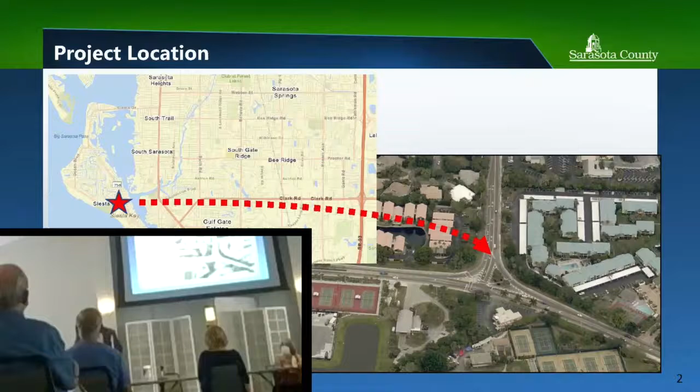We're here today because we have a really good opportunity in coordination with the Florida Department of Transportation. The county will be taking over State Road 758, or Midnight Pass Road, in addition to Stickney Point Road, the portion from 41 west. This is part of a road transfer provision. The county is giving the state River Road from 41 to 75, and the state is spending roughly $50 million to widen that road, along with the county's $25 million to build that project starting next year.

A term of that agreement was that the county would take over these roads on Siesta Key in perpetuity. But the state has committed to providing an intersection improvement project that's also part of a larger project, which is resurfacing Midnight Pass Road all the way from Stickney Point Road up to Shadow Lawn Way. The reconfiguration of the intersection at Midnight Pass Road and Beach Road has been in the works for several years.

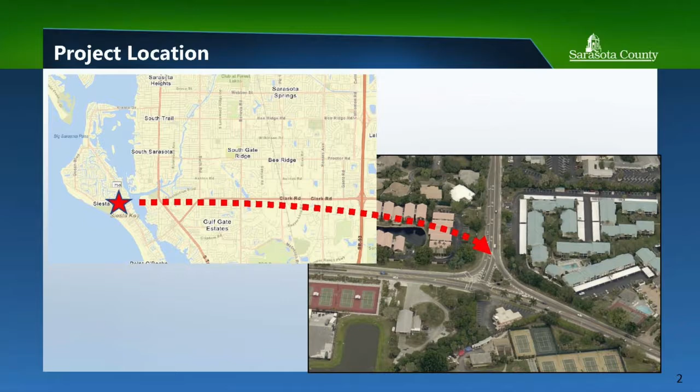It got started back in 2015. The state actually came and had a meeting, similar to this, a workshop, and provided some alternatives to the community.

So in 2015, they provided three alternatives. One, obviously, is a no-build alternative. The second alternative was to improve the existing signalized intersection, so remaining with red, green, yellow lights and pedestrian crosswalks, and I'll go into more detail on that. The third option was to reconstruct the intersection as a roundabout.

In 2015, the public was not in favor of a roundabout. So the DOT, while informally in favor of a roundabout, decided to move forward with alternative 2, the signalized intersection. Currently, from 2015 to now, they have gotten to approximately 60% design, and this all aligned with our road transfer project.

The question arose at some point: is there any consideration to revisit the design of this intersection as a roundabout? So we talked to the county commission a week or so ago and asked them if they were interested in us going back out to you all, the public, to see if there was interest in a roundabout or not. That's why I'm here tonight, to give you some information on those two alternatives.

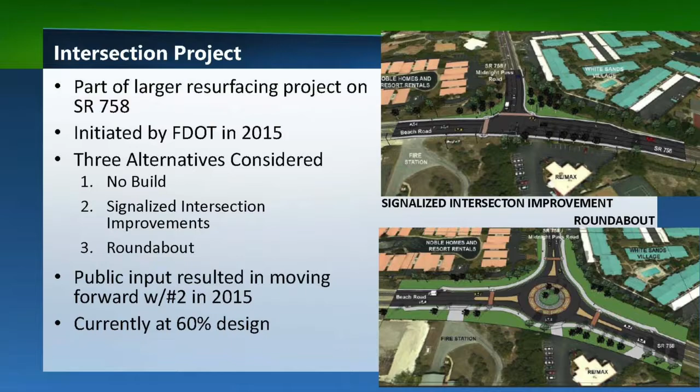I'm not going to consider the no-build alternative because the state has budgeted money for this project, so there isn't a monetary investment, so to speak, for the construction. But there is an alternative for us to consider.

When I go to the next page, consider a roundabout that the state said they would fund. The cost for that is about $1 million more than the standard signalized improved intersection, and we'll go through some of the details on that. It's really about the design of a roundabout.

If the county commission were to receive favorable input or make a decision that they wanted to pursue that option, we would have to bear the cost of that — the cost of receiving that additional $1 million from the state to build a roundabout. So a little over $300,000 to do that design is what we're estimating.

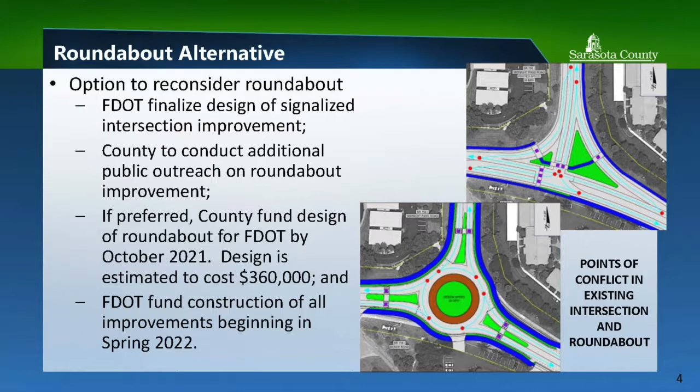We would have to complete that design by this time next year, and the state would start construction on either one of these projects in the spring of 2022. So there will be some construction activity out here in the spring of 2022, hopefully carrying it through just after the 2021-22 season, and then getting it through. It will probably be into the next season regardless, but the DOT will be managing that construction project.

Next slide, please. So here is the proposal for the improved signalized intersection. You'll see some fairly major changes here. If you look at the map, the biggest changes are that they're taking out those free flow lanes on either side of the north side of the intersection and turning them into standard turn lanes.

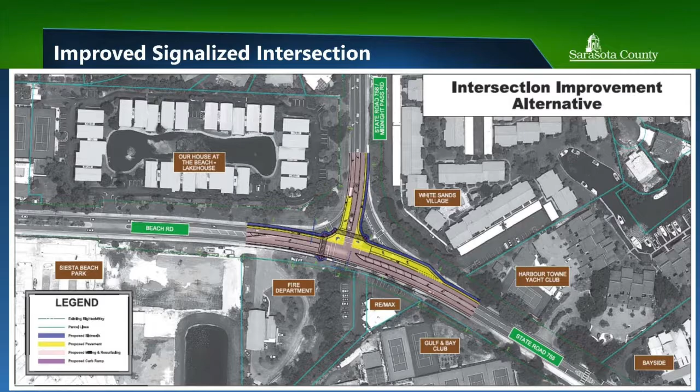The next page goes through a couple of the alternative options on this. So those free flow right turn lanes will be eliminated. You'll still have crosswalks on the north side and the west side of the intersection, shown in orange on that right graphic. Those are conceptual graphics at this point — obviously they're at 60% design with this effort. But one of the things that is a little less desirable about this option than the roundabout is that it retains all of the existing conflict points.

A conflict point is where you have the chance to interact with two of the same entities, or the chance to interact with a vehicle. So a pedestrian in a crosswalk within a travel lane would be a conflict point. A road intersection point where two cars can collide would be a conflict point. In all designs, we try to minimize the amount of conflict points within an intersection.

With either of these options, we don't anticipate any needs for additional land acquisition, and the fire station would also be accommodated with both alternatives as well.

One of the big things we've heard about—we had a Zoom call back in May to test the waters a little bit with several members of the Siesta Key stakeholder community—and we heard that the biggest concerns for any alternative other than the signalized alternative were pedestrians, and then the familiarity with something different, like a roundabout.

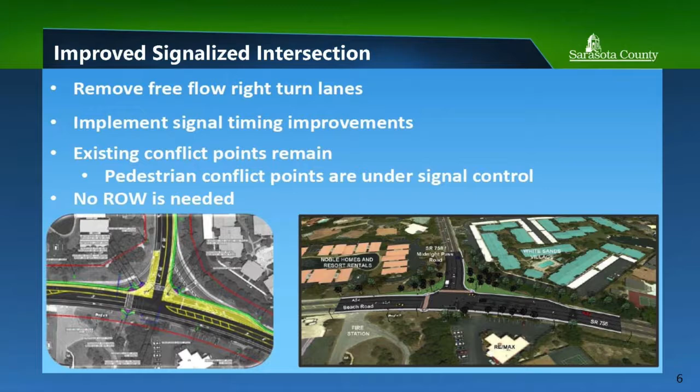So these are some more concept plans of what it would look like. Honestly, it would look fairly similar to what it does now. You just wouldn't have the landscaping—that one little landscape triangle that's in the middle of the road there between the northbound turn lane on the northbound direction. There are some landscaping that would be involved as well with this project, but for all intents and purposes it would look pretty similar to what it is.

And the computer models, obviously, they show some things in here that aren't exactly correct with the topography out there, but it is generally what the design for the signalized intersection would look like. Next, sir.

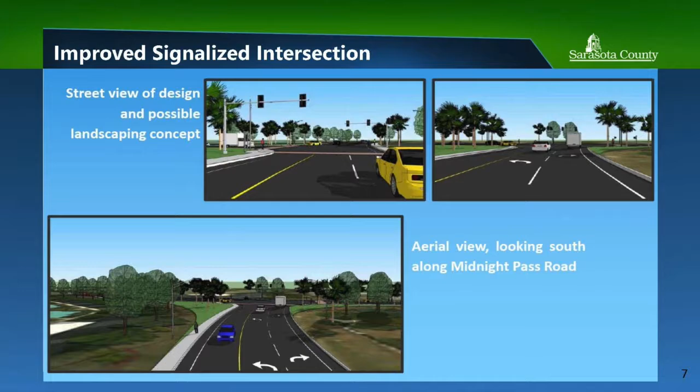One of the things here—all roundabouts, if you've seen them, there are many, many more throughout the county and the city as you drive around these areas. But they do have a landscape feature in the middle. Next slide, sir.

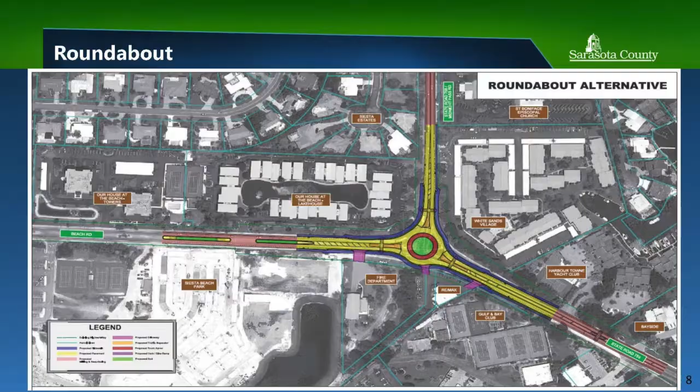If you go to the next slide, there's some more concept drawings here of what it would look like. Obviously there's a little less land than that on the beach side, but it is different looking, though it does match kind of the sense of space and place that the area is taking on. There are quite a few roundabouts, and that may be one of the things—back in 2015 there were fewer roundabouts, and some of the previous issues the county had with roundabouts maybe had some influence on that. But especially downtown Sarasota, they're building a lot of roundabouts there on 41 and downtown itself.

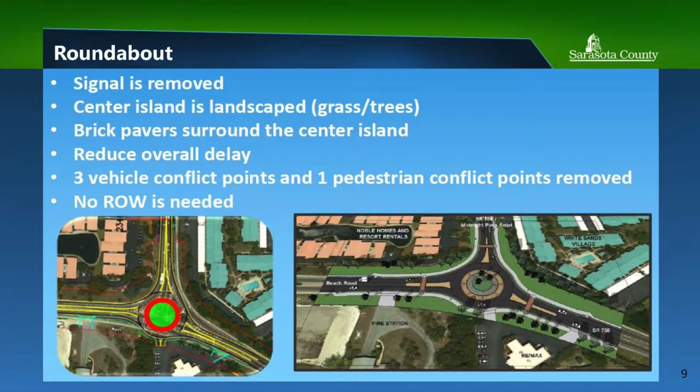One of the concerns we also heard about was the ability for, if traffic is backed up from Stickney Point Bridge all the way to the north, and it backs up through that intersection, right now you have the ability to get into the left or the northbound turn lane onto Midnight Pass to get out to Siesta Drive.

There are so many designs for roundabouts. They're very functional as you can design them how you need to manage your traffic. This is one I found a picture of on the internet. I did a little photoshopping to make it more specific to what we're looking at here. You would have a dedicated left turn to get around that side of the roundabout, and then a dedicated through lane.

It would be signed appropriately, so if you're approaching the roundabout, you would get in your correct lane and then move through the roundabout appropriately. Those kinds of traffic movements can be handled fairly well with the roundabout as well.

And then you see there are crosswalks in this picture. Pedestrian safety, of course, is number one. We know there are a lot of folks who come from here, doing valet or paid parking, and walk through that intersection to get down to the beach. One advantage is the crosswalks would be much further away from the intersection with the roundabout, backed off so they cross at a more controlled location.